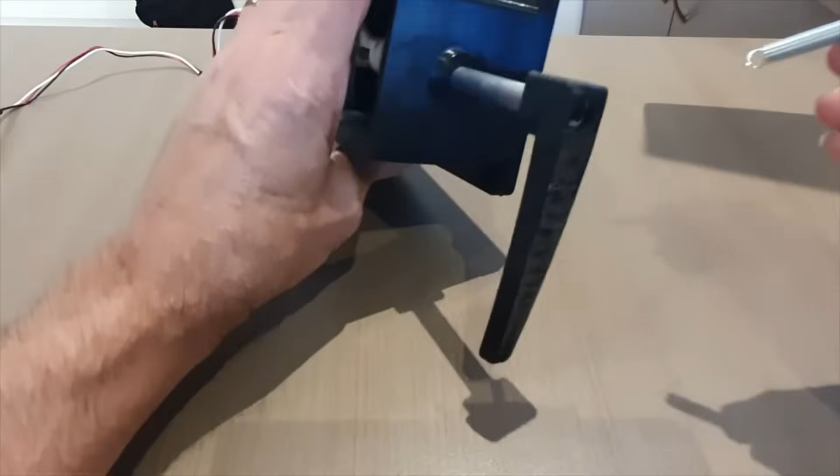I've managed to get myself a spring from a local hardware store, and that spring will actually work quite well going through the center of the shaft like that, and then I'll be able to do that from the other side. So what I need to do is make some modifications to this outer casing.

Because if I've got this in the fully extended position, not that, but in the retracted position, which is probably about there, this is the point where one side of the band is activated and the other side's just on this bit at the back here. I'll show you that in a moment.

But you can see the problem that I'm going to have is the length of this particular spring. It's going to be too long. So how do I resolve that?

Well, I extend this casing. It's about 50 millimeters, and then that'll put it under slight tension in that particular configuration, and obviously there'll be more tension once I pull it up. So that's what I'm going to do.

I'll just show you what I've got here now. This was pretty crude at the time, but it was, I guess, a bit of a prototype, and it has actually worked quite well. I'll come back once I've got some of this off.

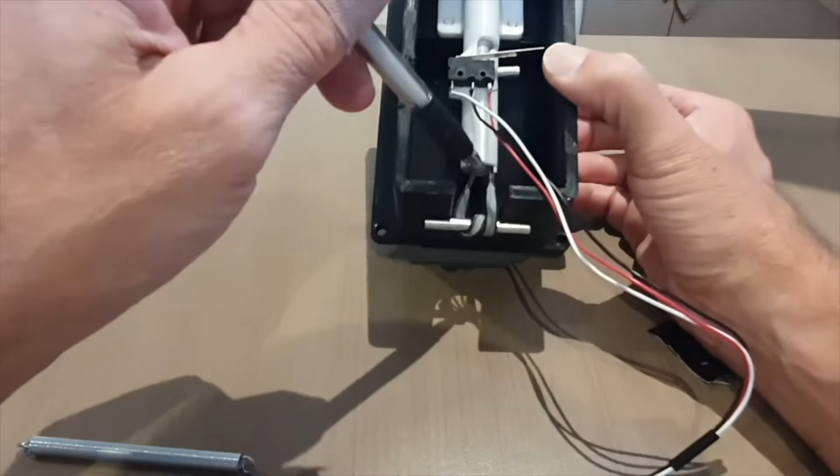So here you can see what I've got there. I've just got the bands that were wrapped around. That band went up the inside of this here, and then interfaced with that little piece, wrapped around the back, which was just a little keeper piece that goes in there. And then it was under tension, so it would spring back and activate the limit switch.

On the back here I just had a crossbar, and then just to hold it in position I put a little bit of tape across that.

What I'm going to do in fixing it up is extend this out, and create a little channel through here that this sits in rather than just being like that. So I'll have this sitting inside a bit of a channel there, so it'll rest nicely, and modify that all up. So I'm going to pull all this apart and then modify it.

So what we might do is show all this apart, and then I'll jump to Fusion 360 and we'll show how we're going to modify it in Fusion.

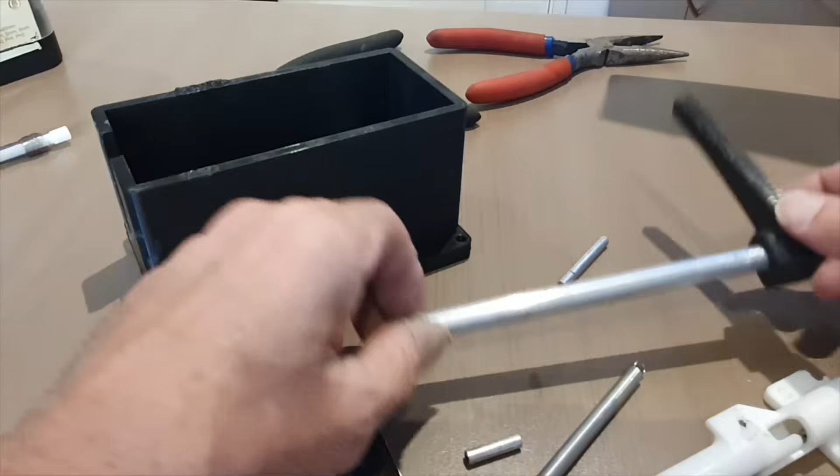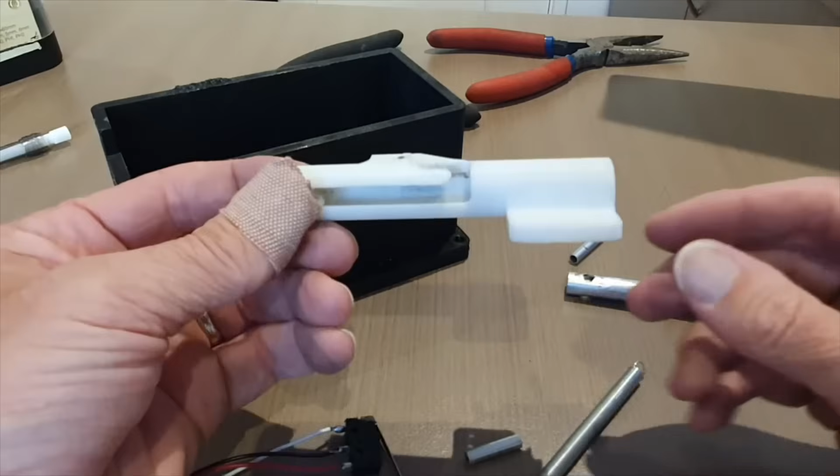Alright, I managed to get it all apart. Some bits I can save, some bits I can't. The shaft and the handle is going to be okay, so I've kept that piece. That'll be good. The actual piece that sits inside there where the shaft goes through, for the mechanism engaging and disengaging with the limit switch sitting on top.

This split and cracked. Need to make another one of those. We'll show you that in a moment in Fusion.

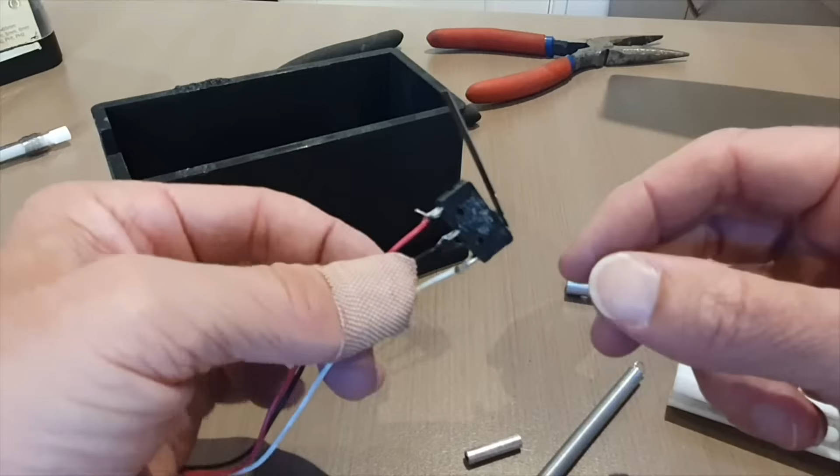Limit switches is fine, so just pull the limit switch off. I did a couple of super glue tabs on that to connect it, and it worked fine. I'll do the same thing again.

You can just twist that off. That was fine, all the soldering still intact quite well, so that's going to work fine. So I've kept the limit switch, which is good. Obviously got the two little tube pieces here, which I need.

One goes through here to be able to grab the spring. It'll go through, as you can see, grab the spring, come out the other side, something like that. I'll get that to work eventually, but yeah, you get the idea.

And obviously got the little keeper piece at the back there, which I'll put on as well, and then I'll relay that into a channel.

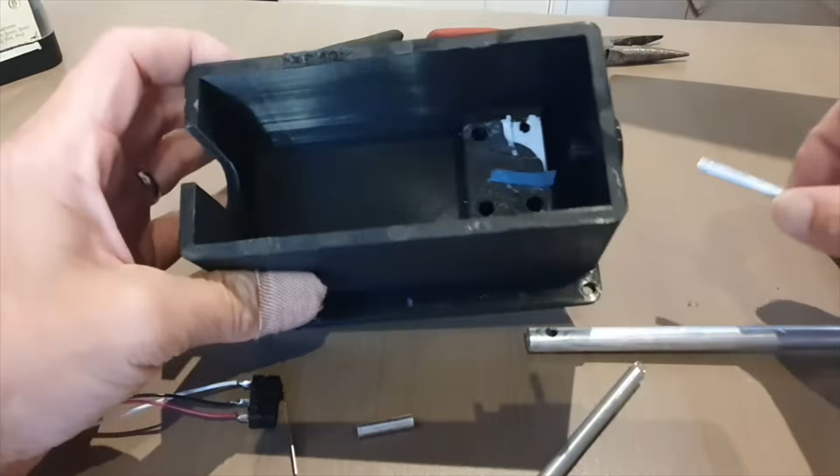This casing itself needs to be extended, and to be honest with you, it's complete cactus inside here, so I'm going to completely make a new one and 3D print it anyway. I've got to modify the box, take it out another 50 odd millimeters, so we'll do that. Let's jump into Fusion and make the modification to the model.

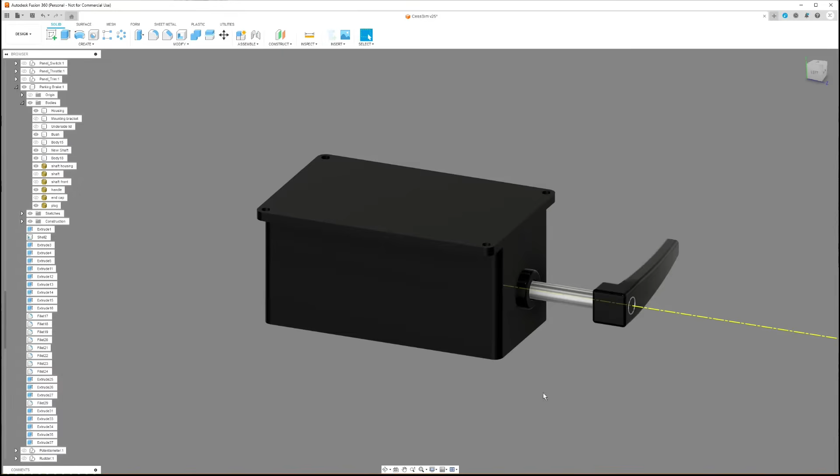Okay, here we are in Fusion. As you can see, I've got the parking brake. I've actually got it mounted in the correct position now, so I'm just going to flip it over and make some modifications to it. So we'll turn it over. That's what you saw from the inside there.

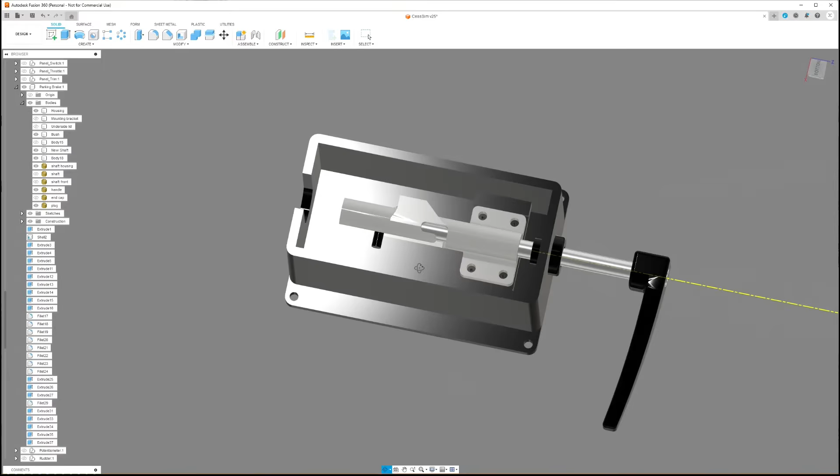As you can see, I've got everything modeled in my simulator, so I've just pulled everything else out. We're going to modify this box, and what we're going to do is extend that part out by 50 millimeters. That's effectively what we're going to do. The rest of it I'm pretty happy with, we can leave it as it is.

Once we've done that, we should also probably just put a little channel in there as well. So we'll do those bits first, and then I'll come back.

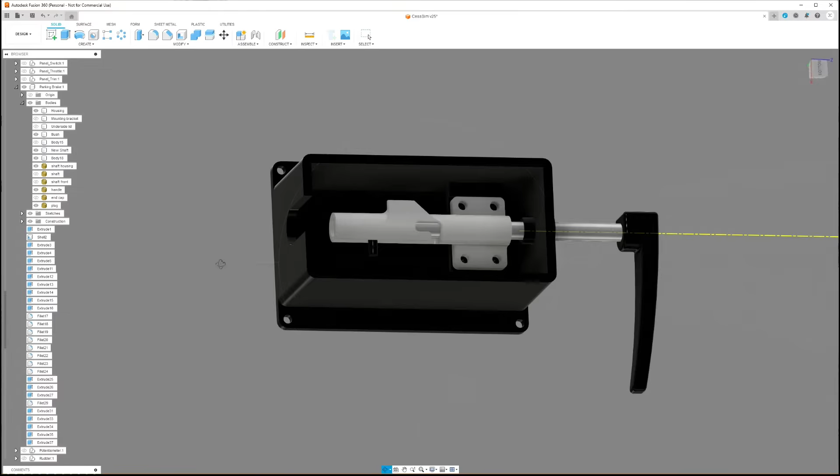I'm not going to make this a Fusion 360 tutorial, but effectively I'll keep this base here the same, and I'm just going to extend this out by 50 millimeters. You won't see any of that because it'll be underneath the panel at the back. It'll just come out over here like that.

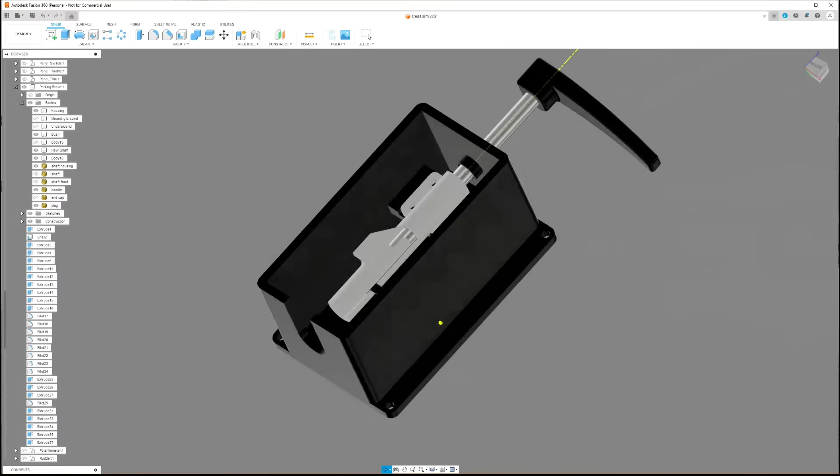50 millimeters there, and then just put a little groove, a little channel groove into that to hold that shaft piece in. There's a retainer piece there, and then we'll be able to put the spring on under tension through that, and then reconnect it all back up again. So that's what we're going to do. I'll show you what it looks like in the finished Fusion model.

Okay, here we are back into Fusion 360, and I've made the modifications to it. So what I've done is effectively extend that out by about 50 millimeters, extend the end of this, as you can see from previously.

Created a little bit of a recess, a hollow if you like, or channel to put in the 5 millimeter bar across there, just to hold that in as a retainer. Now what that'll do is in that retracted position, the distance between this, which is where the spring will connect to inside that shaft via that little tube piece, between that 5 millimeter tube and that 5 millimeter tube is just on 80 millimeters, which is the relaxed distance of the spring.

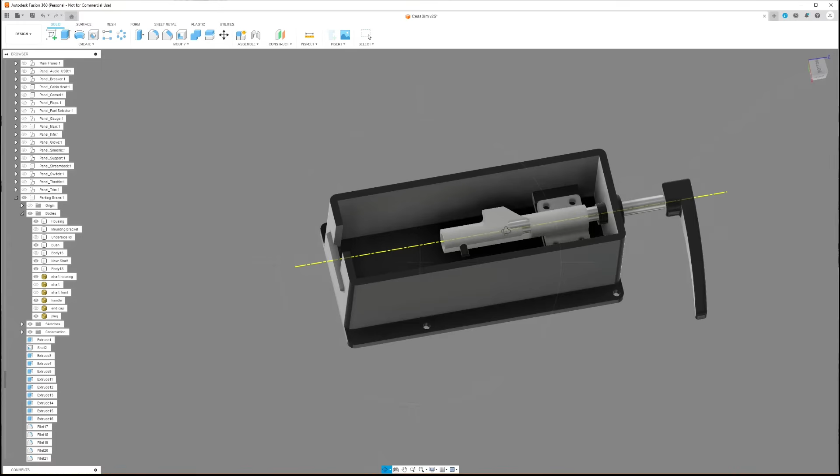And then obviously when you pull back, you'll have that on tension, and then your limit switch will be mounted up here.

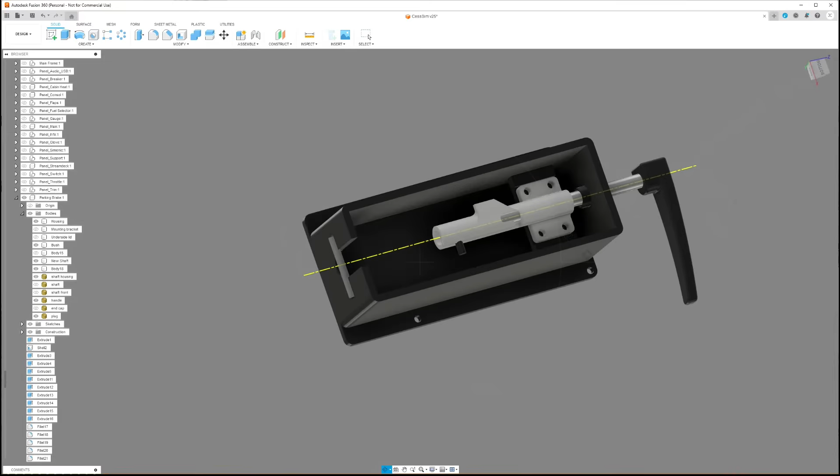So now what I need to do is 3D print all the bits that I wasn't able to salvage, which is obviously the brand new housing. I need to do this little piece here, and I think I also need to do this little hub piece at the back as well. So I'll get those bits 3D printed, and then I'll come back and show you what that looks like, and we'll start to put it all together.

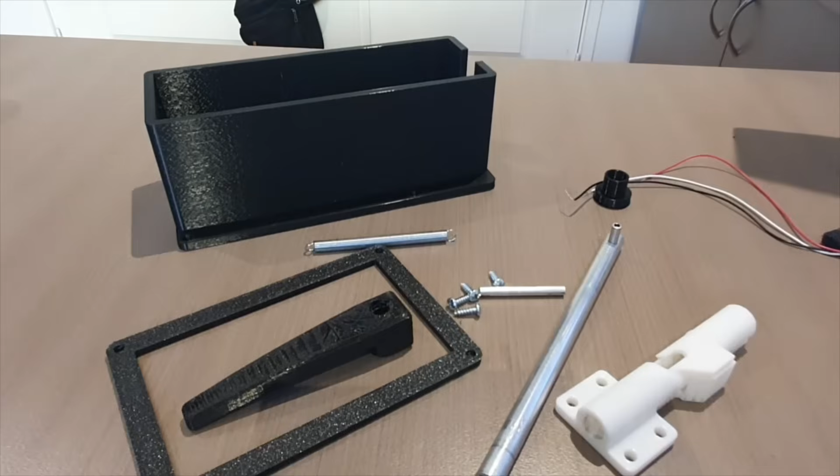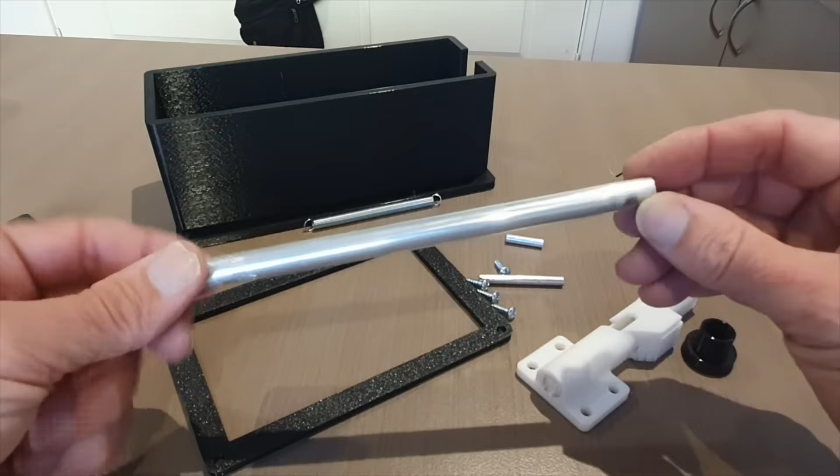Okay, here we go. All the parts are now 3D printed. Just to quickly run through those - obviously I retained the handle, that didn't have to be done again, that was good. Pulled everything else apart. Obviously the main handle shaft there, retained that. And I did a new one of these.

Now that's a model, this is not my design, I managed to get this out of, I think it was Thingiverse. If anyone's interested, I can always pop it in the description below. But it's fairly straightforward - just a tubular thing with a little slot through the side for the handle to go up, and then you turn it, and your limit switch sits on top, and that sits into my casing here.

3D printed the new casing, and again extended that, which you saw in Fusion. So that's all now been redone.

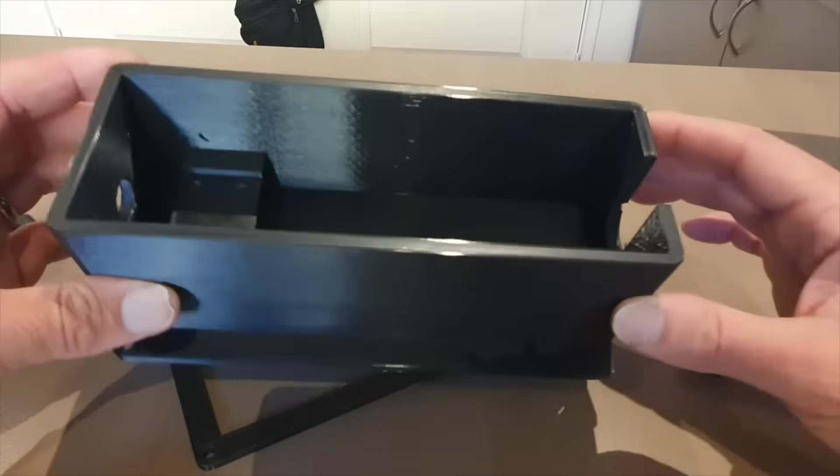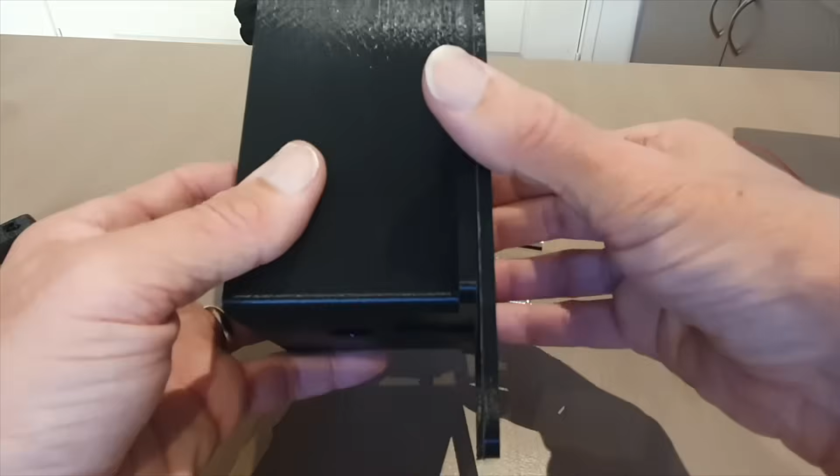This is just a little small lid adapter. The way that I mount mine, upside down, this is only just for my own one. I've just got a couple of small bolts on the underside of my frame here, so this is just to raise it up a little bit so they don't foul, but you probably wouldn't need that, depending on how you're mounting it.

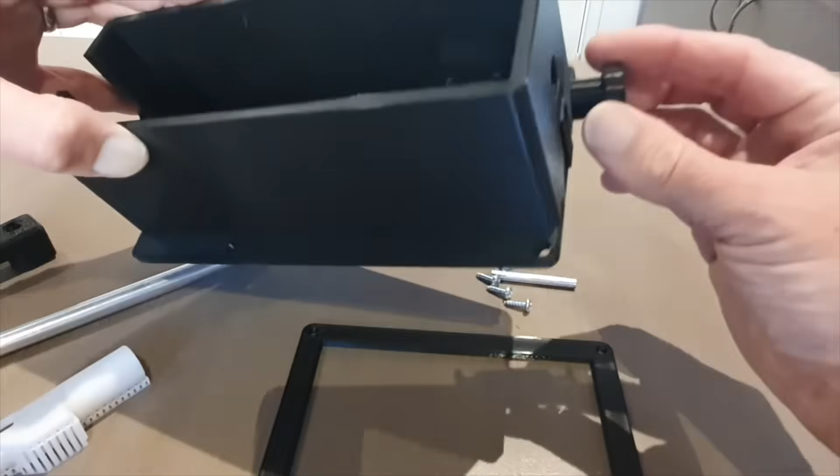But this whole box here literally is just for the housing of this and everything else. And then there's just a small bushing piece at the back there which sits into the unit like that. And then obviously the spring, with a couple of small screws just to hold that piece in place. And they've retained these here, one for the back for the spring, and one to go in the side there.

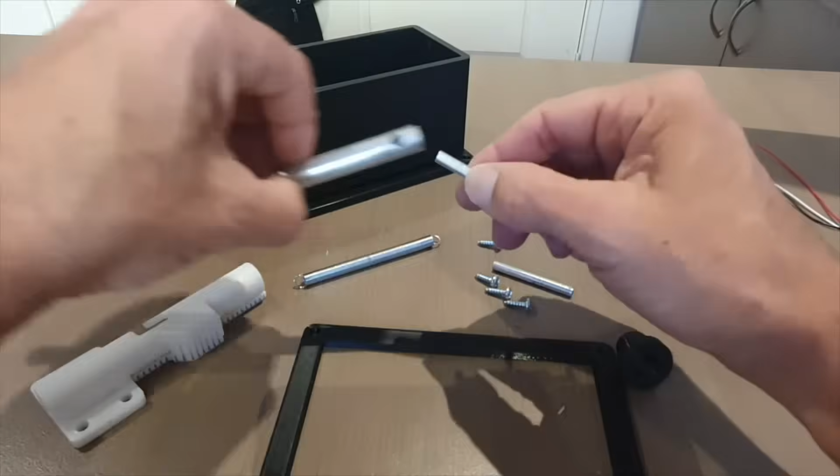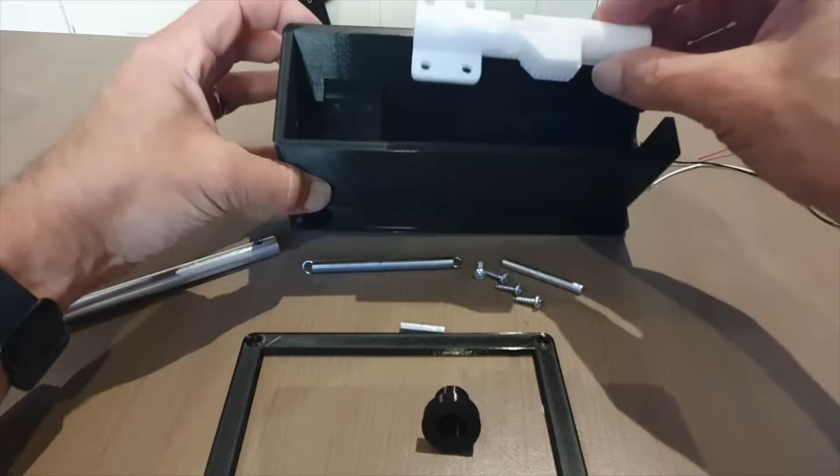So realistically what we need to do now is assemble the whole thing. To do that, I'll fundamentally be bolting that into there - using those screws to mount that through into there like that. And I think what I'll do is cut here and cut back to me sort of assembled, without showing the assembly, if that makes sense. Just bear with us, I'll come back in a sec.

And there it is guys, all assembled. I've got the limit switch in there, and as you can see we've got the spring action with the handle all now assembled. We literally just pull out and it releases back in, turn and activate the limit switch. So a very simple mechanism, but it really works.

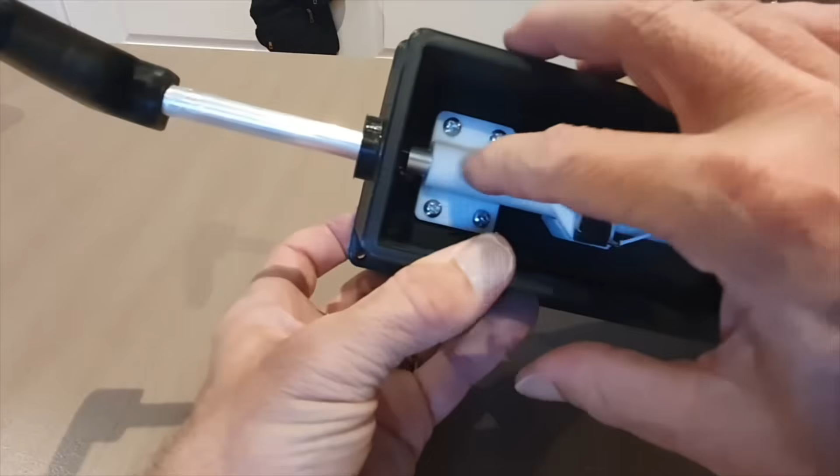I think the other thing I managed to do was just a little bit of super glue behind this here, and that seems to have held it in quite nicely, so I don't think I need the tape after all. Limit switches in there, obviously just secure those down with some screws, and everything else was glued into place. So that'll get mounted up now inside my frame, and yeah, job done.

It's a fairly basic parking brake, but it certainly does the job, and it looks pretty good once it's mounted inside the sim. Hope that was of some use to you.